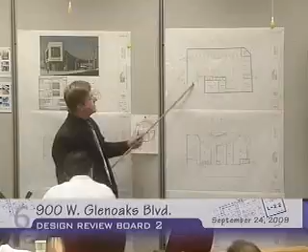Over here, starting at the top, we have the subterranean parking garage layout, showing the access coming off the back here, which includes the trash and recycle area, a lobby to get upstairs, as well as the electrical and mechanical room. Next, we have the site plan.

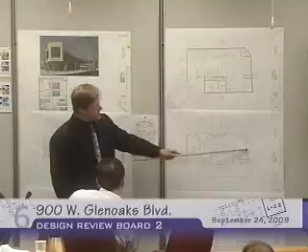It shows the proposed building, curved shape toward the street, which has an open area or open space at the front with seating and a landscape planter. At the back, we have the 12 on-grade parking spaces with planters on either side, as well as a small planter here. Staff is recommending that the planter continue along Highland to provide more of a buffer to the building, as well as some additional planting or planters within the open space area.

This also shows the floor plan of the proposed retail spaces on the first floor, and the second floor, which is the offices, connected by a common balcony walkway.

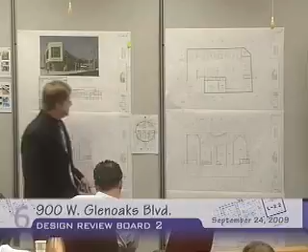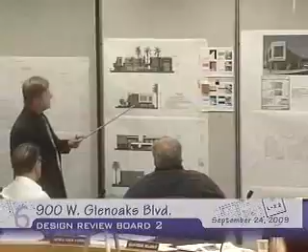Here we have a perspective looking to the southwest from Highland and Glenoaks. Site plan, roof plan, colors and material sample board. We have the colored elevations from Glenoaks, from Highland, from the alley, and then on the westerly side, which is next to the commercial building.

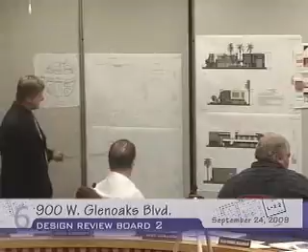Over here, we have the landscape plan, irrigation plan, and I've also provided a zoning map, which gives you a layout of how the properties are within the surrounding area.

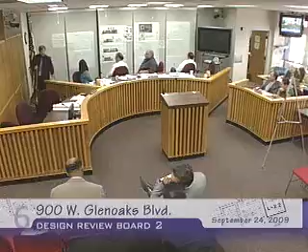Do you have any side picture? I'm sorry? Do you have any picture? Oh, it's in the back. Any other questions for staff? Sorry, that concludes staff's presentation. I'm available for any questions.

Thank you. We'll go right to the public hearing. I have a card from the owner, Sam Manukian. Please state your name and your address.

Hi, my name is Sam Manukian. I'm a managing partner of NB Holdings. My address is 333 East Glenoaks Boulevard. Thank you for the opportunity to address the board.

This project has been many years in the making. One of the first things that we did before we even submitted anything to the city is we met with the Homeowners Association for the area, and we presented our plans to them. They, from my understanding, presented to the entire board and voted to support the project. We've tried to address any concerns there were, and they were, from my understanding, completely happy with the project and the way it was designed.

I understand the only concerns were from immediate property owners right next to the property, and I asked if there's any way we could address their concerns. We were told that if we just eliminated the entire second floor, that would be their preference. Unfortunately, economics-wise, that's not something we could do. Our height is no higher than the property next door, and we're not asking for any variances or conditional use permits. We've tried to stay within the code. I personally think, and many others do too, that this will be a substantial improvement to the area. Several years ago, we did the project across the street, the Sidewalk Cafe, which also improved the area fairly well. At this stage, I'll turn it over to our design team and be happy to answer any questions.

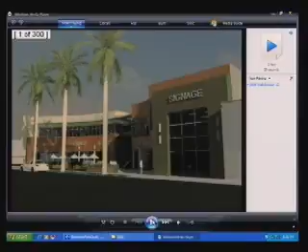I have a model. This is at the northwest corner, and it transitions east on Glenoaks and turns the corner on Highland. And this shows the various changes and differences in facade.

We've been very careful to provide each building facade its own character, all within the same palette of materials, including extensive use of masonry at discrete portions, especially on the south side, because that provides additional sound buffer. With that, that's my presentation. If there are any questions, my business partner, Cameron Arai, was also going to make a presentation, and perhaps we can deal with any questions after. Thank you very much.

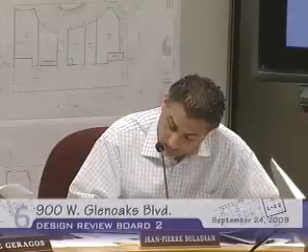You're good. I do have a question since you're both up. I don't know the process of how this works, so I might do it wrong in terms of whether I have to talk to them once separately. So I may do that incorrectly. I do have a couple things, and it was interesting how you all sort of touched on my question in a different way.

The owner mentioned the property across the street, which I think was nicely done, the Sidewalk Cafe. I think it worked very nicely, scale-wise, pitched roof and all that kind of thing. And then you mentioned your firm was talking about how this is transitioning from commercial to residential, and yours is the least transitional of the two. So I'm wondering how you see that, because I think if you put a second floor on the one across the street, you could see it as transitional from commercial to residential. I don't see yours as a transition, so I'm wondering how you see that and how this building, more specifically architecturally, transitions.

Actually, maybe transition was the wrong word. Well, I'll let you off the hook on that word. That's okay.

We see this block as transitional, really the edge of a commercial district. When we look at the existing commercial buildings to the immediate west, they have a very commercial character. We looked at those early on to see if perhaps they had some residential features, and they don't - it's clear mid-century commercial. So in looking at this design, we saw it as being at the edge of a commercial district. Go east, and it's pure commercial for a good stretch. So we see it as a commercial building, clearly, not a transitional building - that's probably the wrong selection of words. It's a commercial building at the edge of a commercial district.

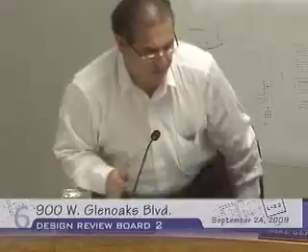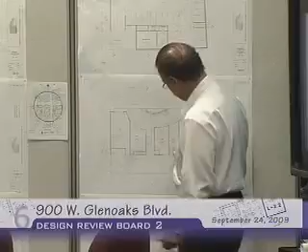If, instead of addressing the corner, this becomes more regular—imagine this face addresses the edge of the street, and then you pull it back so you gain some more space on the back side. So you make this a more regular piece so the corner doesn't become such a big gesture that you feel like you have to go to the corner almost. Then you might create some sort of relief here that ends up as a more intimate courtyard.

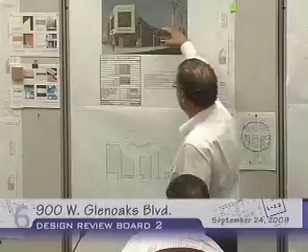And this is a very nice element that I thought maybe could become a bit higher, and that becomes the main piece that provides shading for the whole building almost. So the building is about this big canopy that shades the building.

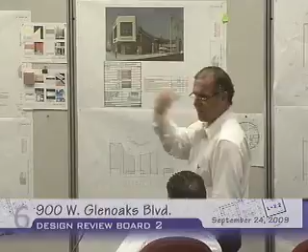I'm saying this not as a way of changing the building, but as a way of looking at what statement the building is making. Because what this is saying is that you'll arrive here and then find your way to someplace else, but it's the alley in reality that you're connecting to in a very strong way. I think this gesture could be somewhat more humble, and it could be about this canopy that simply provides shade for the building and becomes larger.

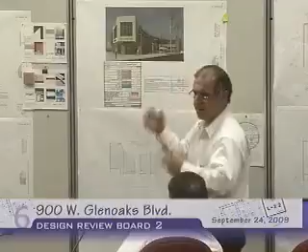This is a very nice piece, but I think it's kind of lost in the volumes that are trying to—they're much stronger than the shading element. But anyway, I just thought maybe you don't need that big of a front crescent. It could become little parts that in that way can connect itself to the scale of the rest of Glenoaks across that face.

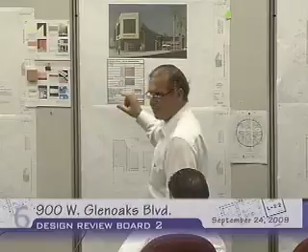I just wanted to share what I was thinking. I think one thing you touched on that resonates with me is that when you think of Borders, like on Brand, with that really great corner element, it is the entrance to the building. That's the way you get into the building. It's telling you: this is the entrance, come in here. And in this one, it's not.

It's that one unit's element, and if you really hadn't been to the building, you'd sort of guess where you went in—you'd go to the gap between the buildings. So it hasn't played up. As I'm working through this talking, I guess that's what was a little bit internal in me: it is kind of the front, but it's not. It's an architectural projection, but it's not the entrance to the building, like to the rest of the building upstairs and stuff. So it's an interesting projection, but...

It doesn't—I'm not sure what it's doing. I think it's hurting the building design. Like I said, it's in isolation from where it is. I think you could understand why that element would sweep—visually, I think that makes sense. I just don't know, when you think about it in context, I'm just not sure it works.

So that's just me. I think if it's in a commercial district where you have a lot of commercial buildings, then you want to stand out, you want to have a presence like that—you need something that says 'here I am.' But here we're talking about residential, kind of commercial, with a lot of the same going on, big tall trees. It's a kind of quietness to that street, and you put this there, and suddenly that quietness is interrupted by this volume and this building that's trying to say a lot of things, which—this building is great somewhere else.

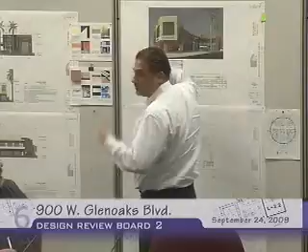You need to soften it. Maybe because of that massing, the window grids are too squarish. I think because you have this horizontal line going, it works fine up to here, but this is like a big box sticking out. Maybe you need to look at softening the corner by adding a more horizontal type of mullion system, change the design of the mullion.

Make it one piece, all glass, more horizontal. Maybe that will soften it and make the building look shorter and more continuous. That might make a difference, because right now you have this big corner box — it looks like a big cubic box.

I know you want a symbolic corner, I understand that, but maybe you should change the geometry into more rectangular shapes, maybe 2-footers by 8-footers, making the corner more linear and horizontal. That will psychologically reduce the height of the building and soften that box. I think that's what needs to be done.

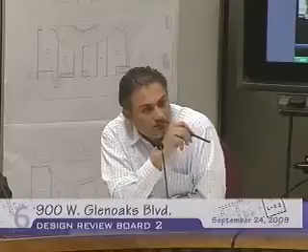On the farther end where you have the curve, on the upper part, I agree with Mr. Giragos, it's too two-dimensional. Maybe we need to make it three-dimensional by introducing mullions protruding like an awning-type shading, giving it more three-dimensional character — a modern look. I think if you play with that, you'll nail it.

I don't have a problem with the back — you've justified the parking in the alley, leave it the way it is. Maybe add a third material. I don't know about that garage parking sign wall — what's the material on it?

Cladding. What color is it? Is it dark brown? Was it copper? No. This one. What is that? That's brushed aluminum. Oh, that's brushed aluminum.

If you see it on the animation, because it's reflecting its surroundings, it shows as brown. Brushed aluminum? It looks like a brick to me. What's it like? Just see the animation, I'm just going to pass by.

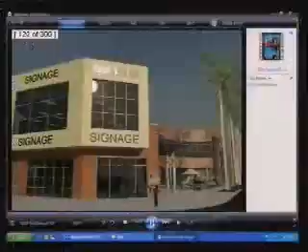Here, this one. What is that one? Oh, you can't touch the screen. You can touch the screen? Can't touch the screen, sorry. Forgot to tell you.

Can we refer to an elevation, please? East elevation. It's only the fascia of the eyebrow. It's only the fascia of the eyebrow. Yeah, that's this one, brushed, right?

It looks like a brick. Yeah, we got it. So you're saying this is clad? No, just the fascia of the eyebrow. Oh, that's nice, the fascia of the eyebrow.

I'm thinking if you do this to soften it down with spandrel glass, you leave the framing in the back of the spandrel, it looks more continuous glass, horizontal maybe. And then this will maybe introduce some other material than... one thing, we'll try to wrap it up and get an answer.

I think the last element for me is what's so nice about the courtyard. I think the courtyard is great. I'd like you to keep it the same size. I think the fact that it swoops is great. So I really enjoy that.

I think what's happening is that whole corner is going to be a sea of pavement, just a sea of pavement. And I'm wondering if there's a way of generating a planter or something out in the corner that might help soften or integrate that corner. It might be another place to sit toward the entrance. That'd be another element it'd be great to have you think about.

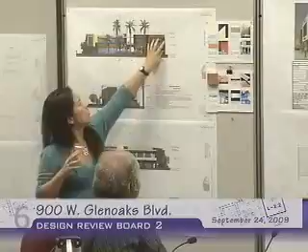It kind of reminds me of outlet malls, where you take the green element on the right-hand side, that vertical piece, and put that on the left-hand side, but smaller. So that becomes your corner element, so you have this giant window space entrance. Over here this gets cut off, or maybe it continues, and somehow gets tied together with the corner piece. It's grounded, so then you can put an awning on it, dress it up, put planters in front of it, so it creates more texture and relief on this edge.

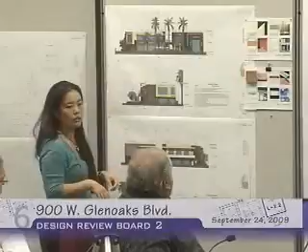And more of a grounding to it. You can put things that integrate quite a lot, because I think the definition you're getting in the courtyard, you could do elements like that near the corner that could be supportive. But by doing that, wouldn't that make it more massive? Isn't that what we're trying to avoid? I think it's the upper floor projecting out that makes it big and top heavy, that piece sticking out, that's the issue.

Well, one of our objectives was to create drama, whether to attract attention. One thing you pointed out is that in the perspective, it's the most dramatic view, it's way bigger. But if you watch the animation, you realize the whole thing is not as massive and as dramatic, as you approach...

We normally don't let have a talk back during our discussion, but I'll let you go. Okay, that's fine. I think it feels like it's because it's so much bigger than the first floor.

Especially with this elevation, the top part is 2/3 the size and the bottom is 1/3. It makes the bottom look like it's squashing it down, and it feels heavy on top. It looks squarish, so that's why it feels vertical.

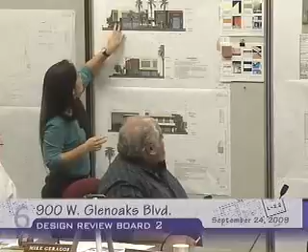I think maybe you could take the other element from the other side and put it on this side, but not as big, and not this high. I wouldn't put it over here because then you'd have an even bigger element. Maybe take these proportions and put them here, and make this glass come up to create an entrance area, so that it's just framing it.

No, I think actually the two sides don't want to match. I think you've taken the right step.

It's just a matter of finding a more humble statement. As I said, maybe the perspective is letting us focus on it too much, overemphasizing the exact spot. He picked the right corner.

Okay, that's what it is. We need a motion. It's your choice, you picked that corner. Turn it over. No, that doesn't help. Okay, I need a motion.

I think probably the staff has to read some of the... Yeah, I think

We'd like to ask you a few questions. Because we've heard from most of the board members, staff is getting a sense that there's an overall appreciation for the design, but there's a discomfort with some of the elements. I'm not going to make a whole list right now, I'm going to hit just a few key points. Obviously there's been a lot of discussion about the corner and the massing at the corner, but not necessarily the overall massing.

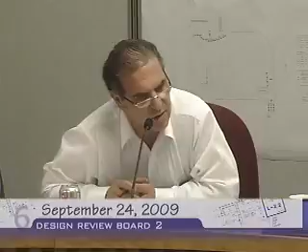Not in general, but it has to have some sort of reason. Maybe if the base is flush and more volumetric, maybe the top can start to recess and lighten up. It's discretionary. So it's not something specific or formulaic that you could make a condition.

It's not trying to say that all of the windows should be deeper. It has to have some sort of reason, but definitely helping the building to lighten up or be heavier at the base, whichever makes sense. But there should be a reason for doing one or the other.

I think the issue for me was, if you look at the perspectives, like the rear perspective, the windows are recessed, and even just that much that you have on the back helps. Because what was getting me was the curve, the quarter turn on the upper side. It's so two-dimensional, I don't know what reason, when there's so much interest everywhere else. So provide a three-dimensional sense to some of the surfaces on the north side. Provide recessed windows in some areas that enhance the feeling of the base and a lighter top.

Okay, I'm seeing nods. Okay, and then, excuse me while I grab the staff report. There were a number of conditions that staff provided that we heard some agreement with, so I'm just going to read them.

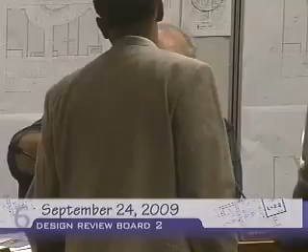Let's take this wall - what are you talking about? So with this wall, you have like a layer that comes out and finishes there, and then you pull back, and it becomes a thin wall, like a thin layer, a blade, like an offset. And then the brise soleil can pull into the side.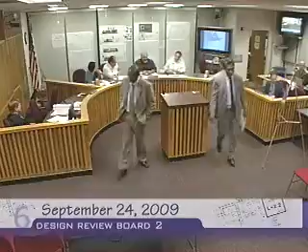Let's focus on the comments. I think if the entire board is in agreement that the base should look stronger and heavier than the top element, then we could give that direction, and another option that achieves that.

They can work that out, because it takes a little more time than we have in this meeting. Let them work through it - I think they know the intent of what we're talking about.

Is it unorthodox to ask them to come back with just solutions to that corner, like if they said we want three solutions instead of just presenting one thing at our next review, so we can comment on the direction? I don't know, they usually don't - they usually just want one.

Yeah, I've been down that road. Okay, is that a motion? Did somebody make a motion? Does that work for all of us? There hasn't been a motion quite yet. Could that be part of someone's motion? Anybody want to make a motion?

What are we doing - do we just have to motion to approve with conditions and considerations? Motion to approve, maybe a redesign. Are we approving it, or coming back to redesign? To have it written for redesign with conditions and considerations.

Okay, is there a second? I second it. This will be roll call. Mr. Beladian? Yes. Mr. McCann's gone. Ms. Sakai? Yes. Mr. Zarifian? Yes. Mr. Garagos? Yes. Motion carries 4-0 as a return for redesign per the conditions spelled out by staff.

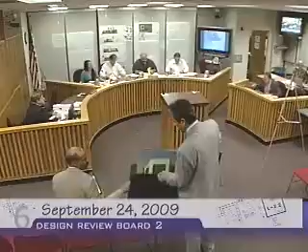The next thing on our agenda is approval of minutes. Since Mr. Malikian is not here this evening, we cannot approve the August 13th or August 27th minutes, but we do have the ability to approve the September 10th minutes. Has everybody read these yet?

You want to read it? Just take a moment for everybody to review it, and we'll vote on it. We'll take a 7-minute break. That was more than 7 minutes. We were timing you guys. I'm just scaring you. This is the famous house.